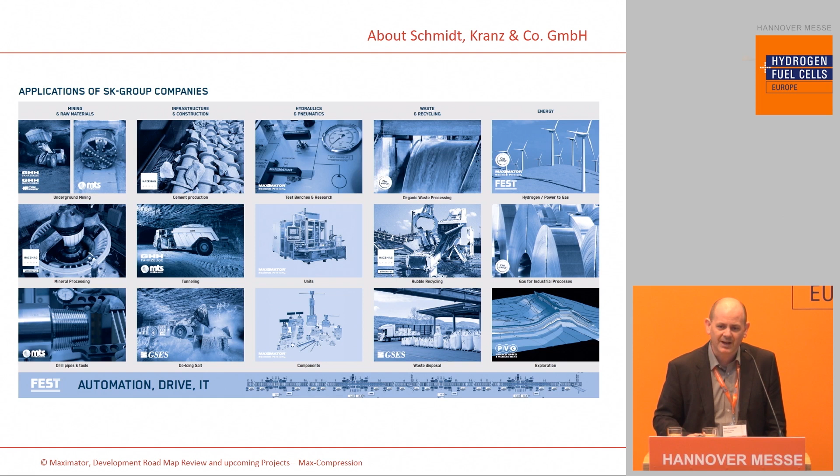So all these companies belong to the Schmidt-Kranz Group. We are doing a lot in the mining industry, and everybody knows the coal mine is gone. So we have to look for new applications, and therefore we are prepared for the future, and we will show you this shortly. These are all the applications where we are in, and the most important thing is on the right top side: new energies, power to gas, hydrogen. These are the new keywords for us, and we do everything to fulfill the targets in the future.

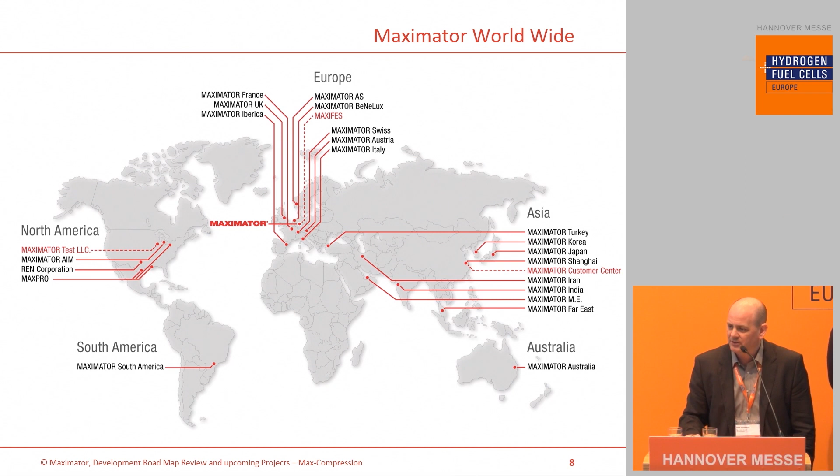So a quick overview about MAXIMATOR. At the moment we are 700 people, 400 in Germany, 300 all over the world. We have a global network, which means we can serve all these new applications worldwide. We are heavily active in China as well as in the United States. And hydrogen, I mean, we have to go to the United States. So we are opening a new sales office, a new service center shortly, because we are delivering a lot of hydrogen filling stations into the United States.

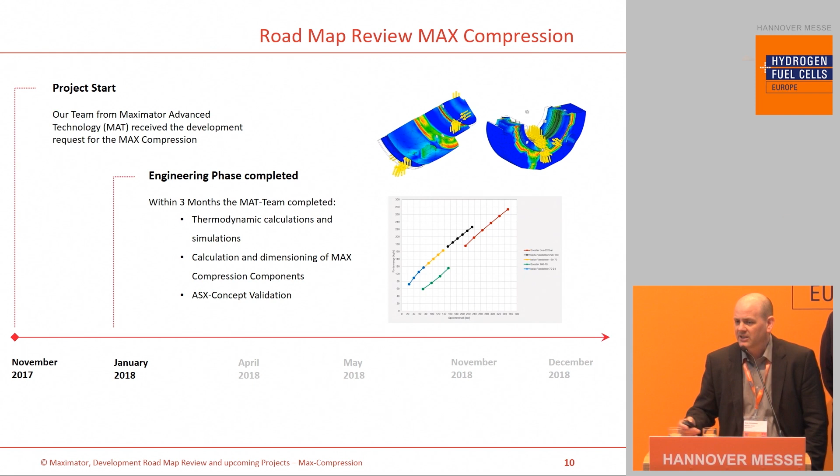So our roadmap for max compression. Actually, we started with a new company in 2017 called MAT, MAXIMATOR Advanced Technology. And we started by the end of 2017. Last year was our first year that we have been here. And within the first 3 months, we have done all the design, all the calculations for the new compressor, all the FMEAs and so on. And this was pretty quick.

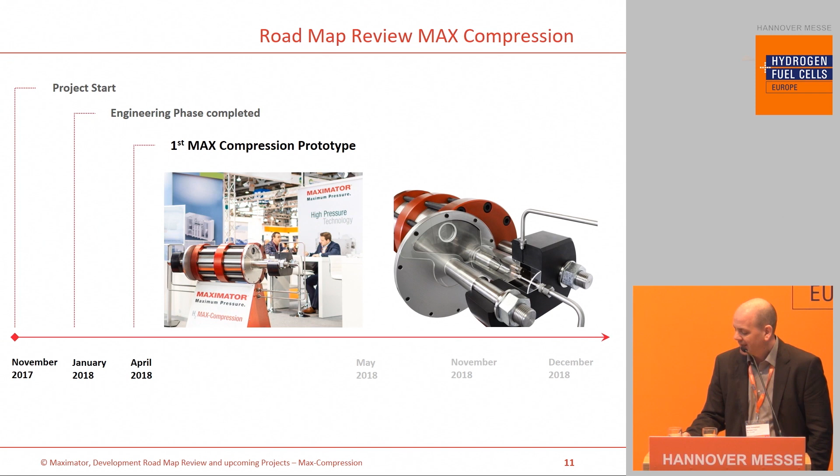And then we came to the show last year, the first time, and we presented this mock-up. And everybody was curious, what are you doing now, blah, blah, blah. And we showed last year already that we have this automatic seal exchange for the high pressure compressor. So everybody is asking me, how can you manage it within 1 year, from the design to a real serial production machine? You can see it on our booth. How is this possible?

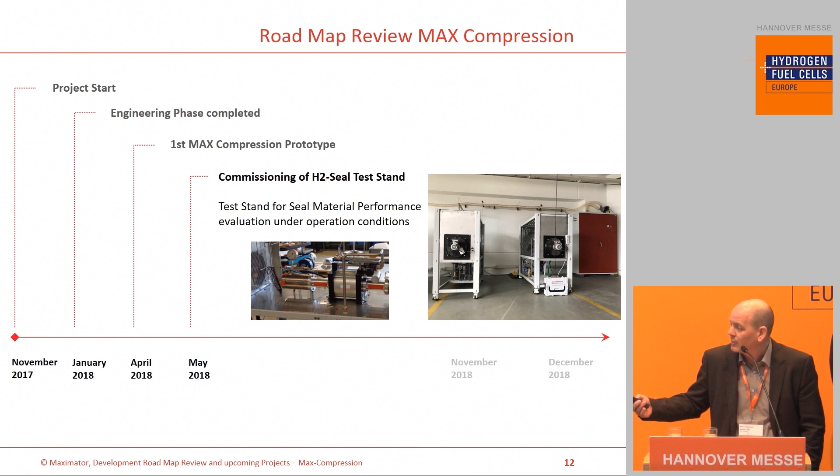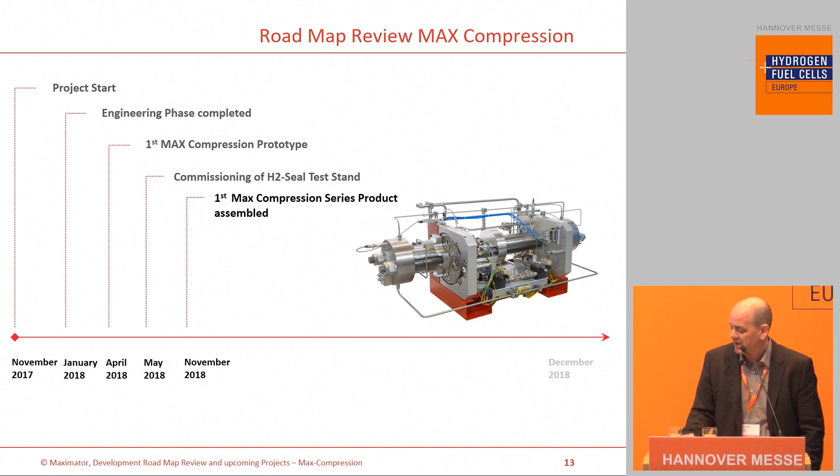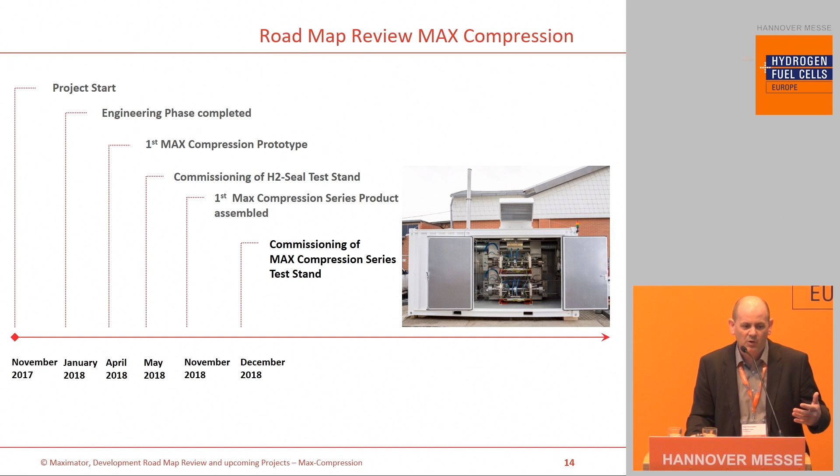So here you can see the result. This is actually the max compression. And I would say after 1 year, it's pretty good. And you can see this max compression system on our booth. Then, 1 month later, in November, we finished the first product. And then we went into our test container. As you can see here, it is more or less a hydrogen filling station. The complete environment in the test container is a complete hydrogen filling station. So to give you a better understanding, and pictures say more than words, we show you a quick video, so that you understand what we are doing and what I'm talking about.

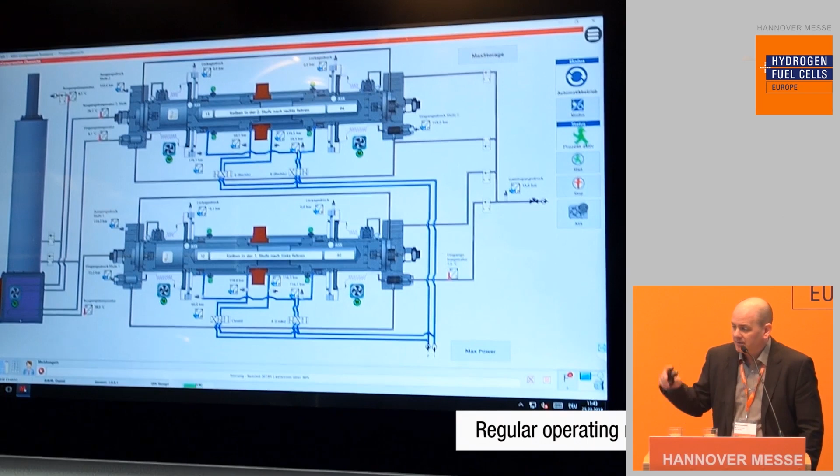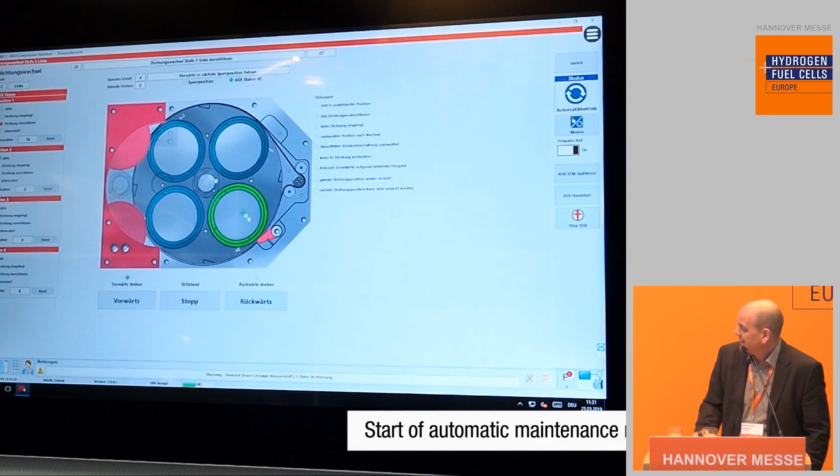So the main reason for us to come out with this new design is pretty clear. If you go to the H2 Mobility site at the moment, you can see all the filling stations in Germany on the website, right? And quite often you see red dots on the German flag. And quite often the problem is the compressor, the high pressure compressor. So therefore we came out with the automatic seal exchange, as you can see here. We are changing the seal fully automatically.

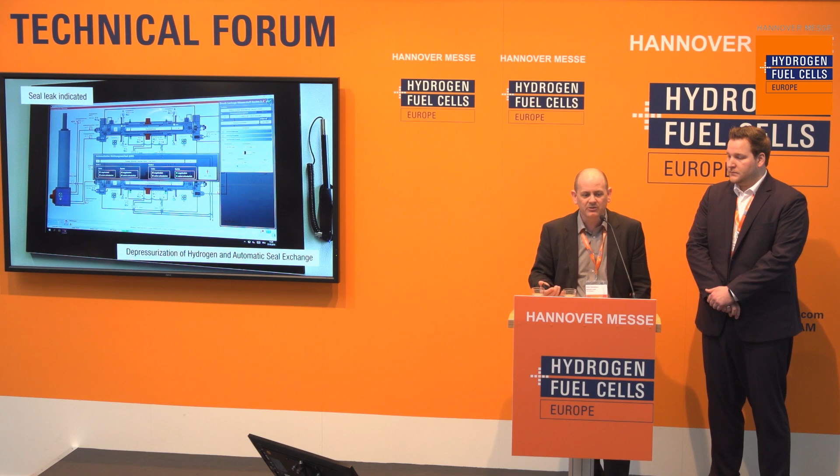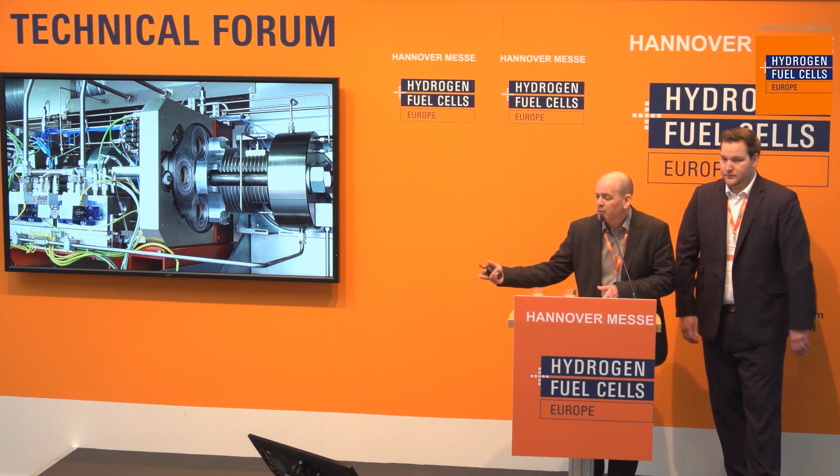The only thing you have to do is put cartridges into this revolver. And if you have a guy at the filling station who has a little bit of technical know-how, he can do it, which means there's no need to send somebody from Nordhausen, where our headquarters and service are based, to Munich or Berlin or wherever. So we have done a calculation, and we actually tested 600 hours with one sealing package. And if this is gone, we put the next sealing in.

And again, this is the first time that the company has realized this, and this is a really big step forward because we have to bring down the maintenance cost, the OPEX cost, and this is a must. Otherwise, the whole hydrogen business has a kind of a problem.

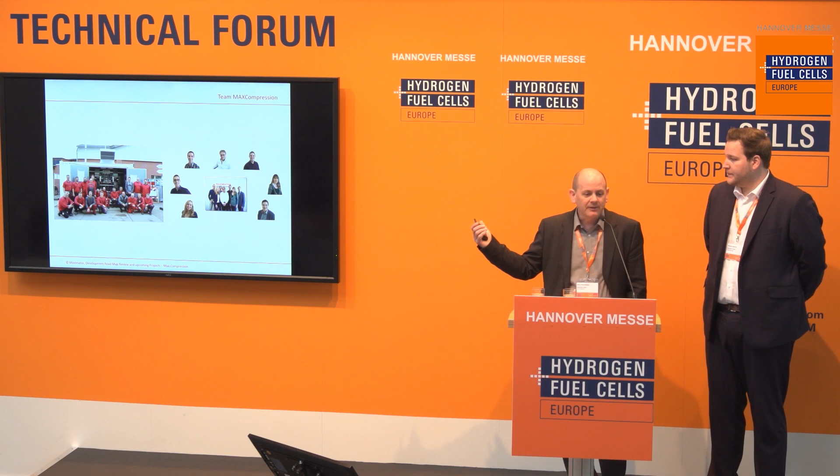So this is very important for me because we are from the sales team, and it's all the time easy to present new products, whatever. But these are the people behind, and I'm really proud about the people. On the right-hand side, you can see the team from Vienna. This is actually the brain from MAXIMATOR right now.

And on the left-hand side, you can see our guys in the workshop. They have done a brilliant job. And this is only possible if you do it together as a team. There are many other people, but I cannot show all of them, of course. But thank you for all these guys.

So, upcoming projects. As I mentioned before, we are building hydrogen filling stations in the future, but we are working together also with competitors, like with McPhy. And the first stage which you see on our booth is for McPhy actually, and they are building the filling station, they are using our compressor. So we are highly flexible also in that. It's a competitor, but we try everything to give hydrogen a full chance.

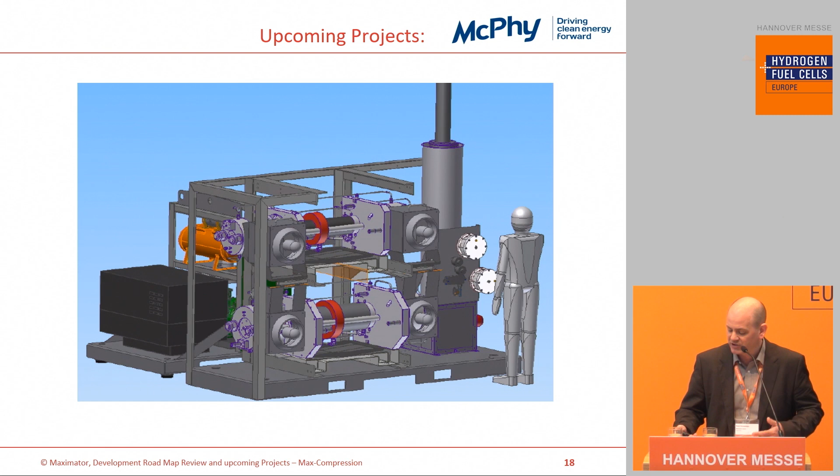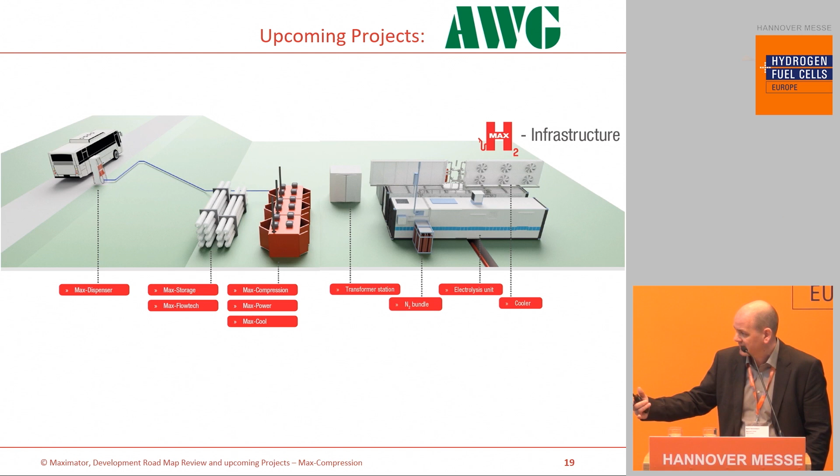Then we have another project in Wuppertal. So we do a complete turnkey project, not only the hydrogen filling station, we do also the storages, we are doing the electrolyzer system. We are not manufacturing them, but we do it as a turnkey project. This is for 10 buses. We start with the installation by, let's say, autumn. And the second phase will be an additional 10 buses. So in total, we are running 20 buses pretty soon in Wuppertal.

Then, of course, Shell is a very important player in the market. So they are doing really a lot to push hydrogen. And just recently, we signed a contract for the dealer value proposition program, which means they are supporting all the guys which are running already a Shell station, and they support for hydrogen then, of course.

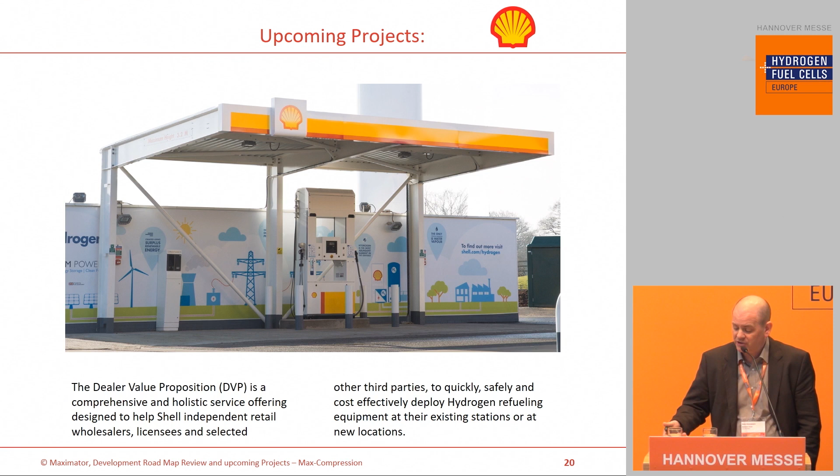And we will be delivering the hardware for that, which means if the guy is saying, okay, I want to have now this hydrogen filling station, they order it directly from us. It's a big program and it started last year, autumn. They rolled it out that time. And we have already a lot of inquiries, and this will be also a big step forward in the hydrogen market.

So this is a quick overview. Last year, we presented it together. We created MAT, I spoke already about it, and TestNet. Patrick will give us a better overview in a minute. And MAXIMATOR Gas Solution is also in place now, and we are producing storage systems for the hydrogen market.

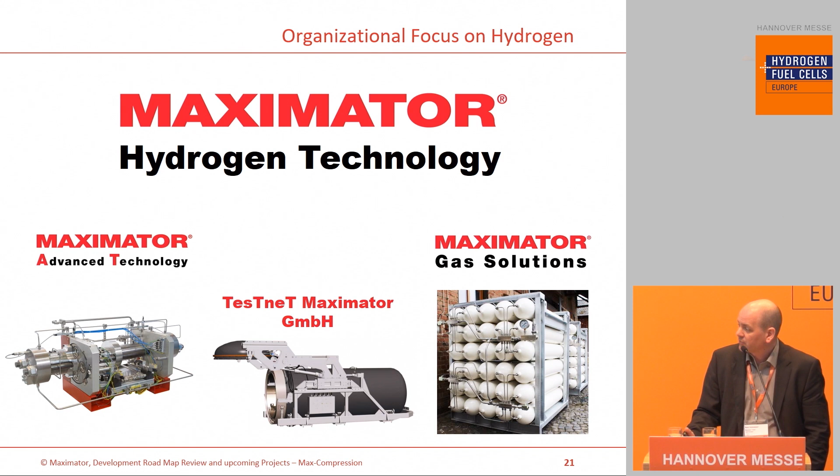So, what's coming? As you saw before, we are really quick with developments. We have many, many things in the pipeline, and as you can see, these are all the different fields where we are in: Max Compression, Max Power, Max Cool, Max Storage, and so on. All is for the filling station, and our goal is to make the filling station much cheaper than what we are getting right at the moment on the market. And we do everything to fulfill this target so that hydrogen has really a chance.

That's it from my side. I pass over now to Patrick, and he will talk a little bit about explosion-proof chambers. Thanks a lot. Thank you very much, René. I just have to adjust it.

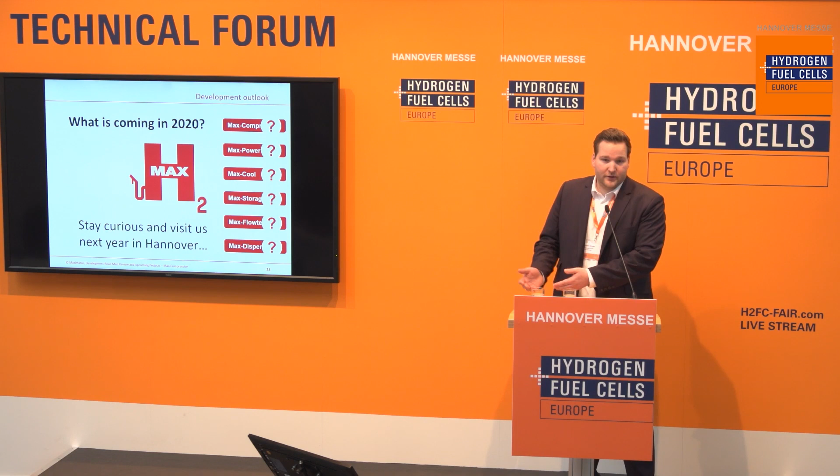Now we heard a lot about the refueling stations, and MAXIMATOR has a global strategy to, on the one hand, come from the refueling stations. From the other side, we would like to help the car manufacturers to bring cars on the road, because you need both to bring the hydrogen economy alive. And I would like to tell you something about an innovation we also did within the last 12 months. It is an explosion-proof chamber for a hydrogen composite pressure vessel.

So when you test a vessel under gas pressure, it should never fail under gas pressure, because there's a lot of energy stored inside of that tank. But therefore, many tests are done in advance. And we would like to offer a new possibility within this testing field. We do that together with a partner.

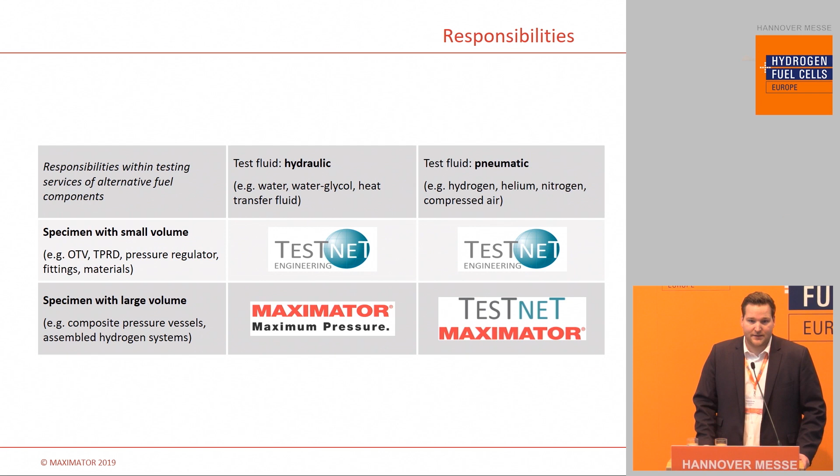It is a company, TestNet from Munich, and we have here the responsibilities within the testing service market. They are more concentrating on the small volumes like on-tank valves and so on. So this is a general division of how the responsibilities work. MAXIMATOR is concentrating on the large volume things, so when we talk about tanks, for example, but only on the hydraulic side. And our joint venture, which was already mentioned by René, is TestNet MAXIMATOR, and this is responsible for the pneumatic test, hydrogen or other gases, on large volumes.

Our requirement for this idea we had some time ago was that we would like to do gas testing without the preliminary hydraulic testing.

So when you would like to do gas testing nowadays, you have to fulfill hydraulic testing up front to be safe that the tank will never rupture under gas pressure, because this is a very event which you should not have. We have the gas testing, which we could do beyond the design criteria of the tank. So, for example, the tank is designed for minus 40 degrees C. Maybe we could test it at minus 60 or plus 150 degrees C. Nobody knows what happens today, but we could do that with that kind of chamber.

And another big topic for the car manufacturers is the misuse. So, for example, when there is a car accident and you have to analyze what happens at that car accident, is the tank still safe, or the customer made some misuse, maybe unintended, and there needs to be a simulation where the tank could rupture. And we would like to create a possibility for car manufacturers to test exactly this.

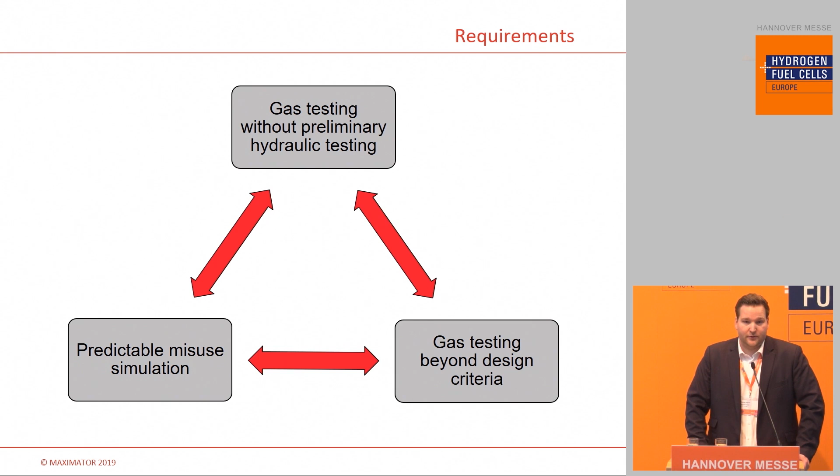Here's one thing, this was nearly the first step, is the TNT equivalent. When you have a full tank, 200-liter vessel, and you fill it up with 1050 bar of hydrogen, you would have an equal of nearly 10 kilograms of TNT for the explosion. So this is quite huge. This is not 100% comparable, because in our application we do not have that thermal energy. It is more the mechanical energy of the pressure wave, because we would always test in a nitrogen environment where it is not possible that an explosion happens actually. It is more an expansion of the pressure wave. But this gives you a feeling what it is about.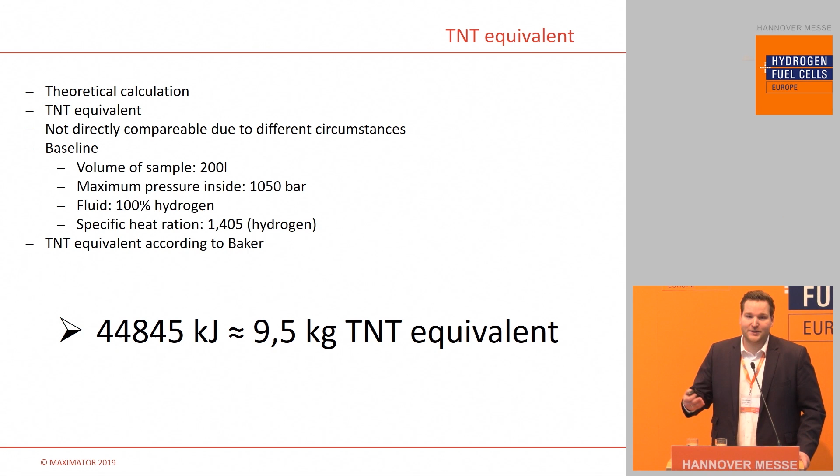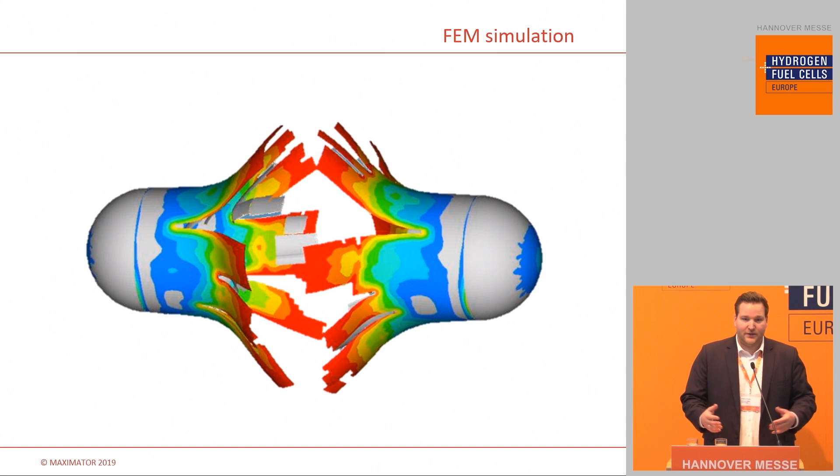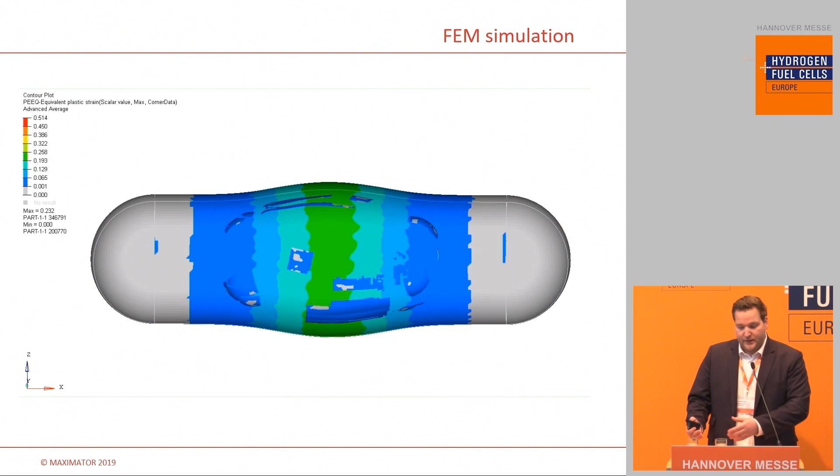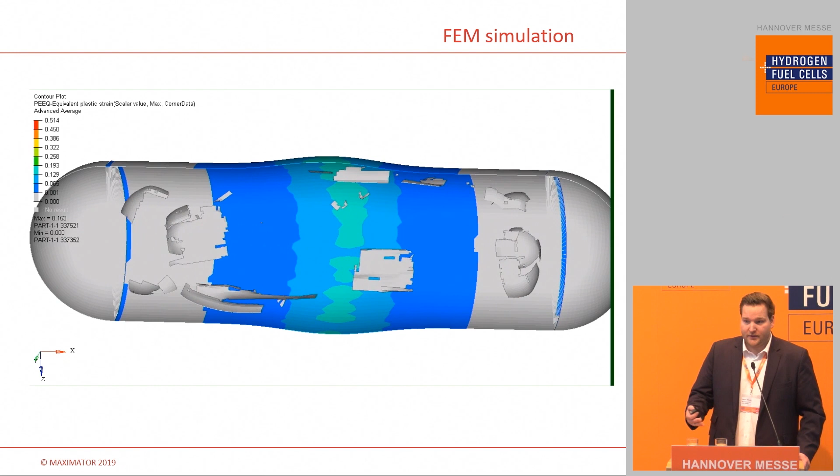And then we started with an FEM analysis, and our first idea, we created a model, a kind of chamber with a wall thickness and a geometry on the inside, and our first thing didn't work. So this was not enough. So within our simulation we saw, okay, this kind of wall thickness and this geometry doesn't work. And we tried to improve ourselves. We had some simulations running to see which geometry we need, which material properties we need, which wall thickness we need, and we came over many simulations to find out which are the right design criteria for our chamber to withstand these energies.

And over time we iterated and we reduced the plastic deformation. And we would still have some very minimum of plastic deformation, so there is not an unlimited time that the chamber is able to resist. So this is kind of a challenge. So we have maybe 10 or 20 of those explosions within the chamber. Then we maybe have to refurbish this or whatever. But this is not an unlimited lifetime safe chamber, because the energy amount is too high.

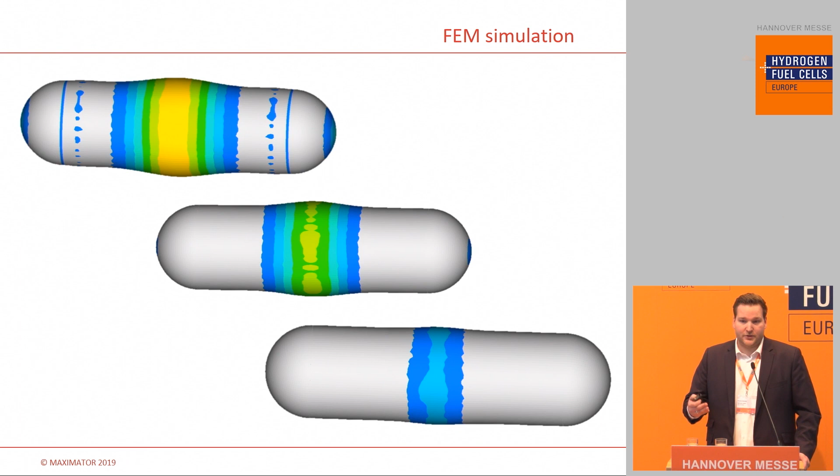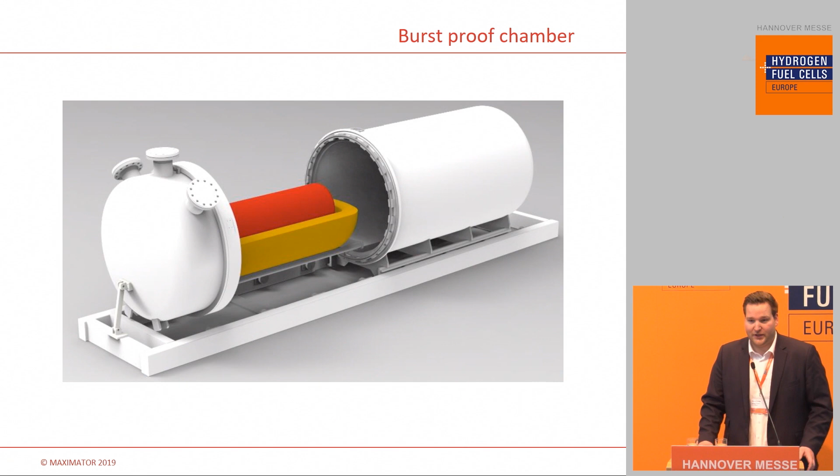At the end, we came out with such a chamber. We have a special material, we have a special geometry, we have a wall thickness which was calculated, and then the next challenge was to find a manufacturer who is able to deal with such thick walls and to bring it to a tube actually. And we made even this, and around this chamber we built up a test stand which is able to cycle, to do the normal cycles like it is done worldwide without the chamber, so normal certification tests, for example. And of course we have the possibility to run these special tests inside of this special chamber.

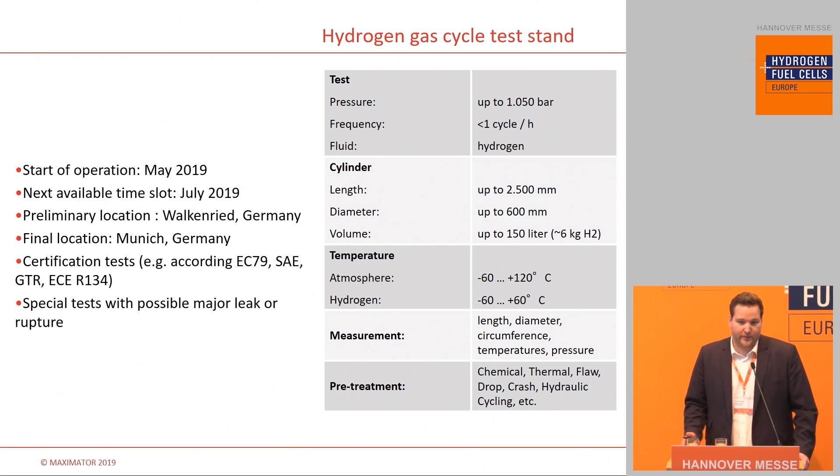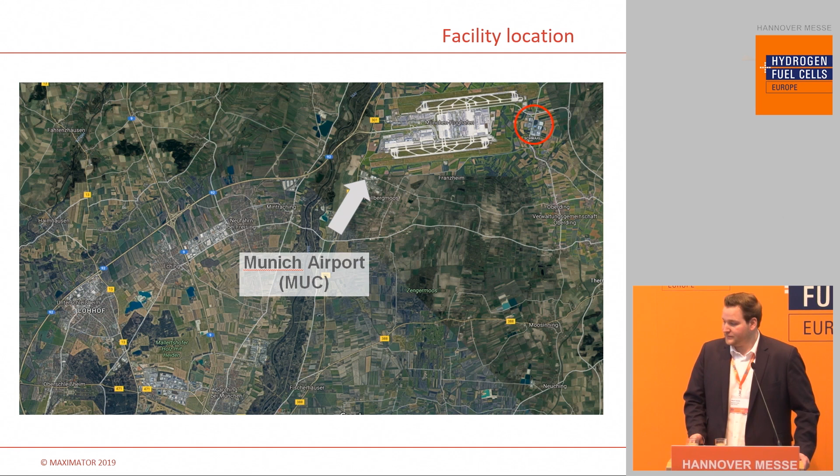I'm quite impressed. It sounds very innovative, and you're moving very fast. So could you also imagine supporting other companies, saying we have the right innovative test bench to support you as well with whatever you're doing? Yeah, of course, as René said, we are also working with some kind of competitors. In my point of view, there are not big competitors in this field because we have to get this thing started. So of course we work with competitors somehow. We see them sometimes. When even our competitor is growing with our help, the market is growing. And we would like to start this market, and then we will all participate in that, right?